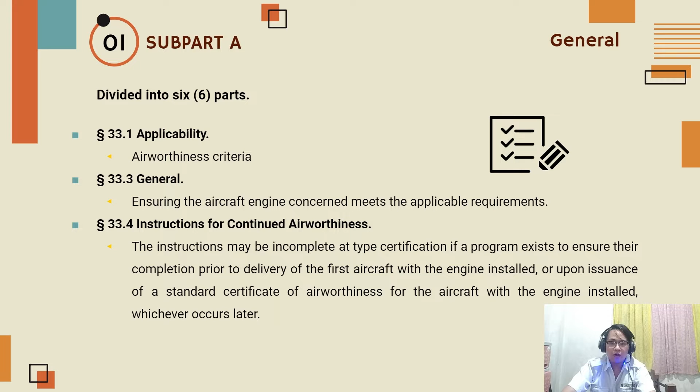The third part briefly discusses instructions for continued airworthiness in accordance with Appendix A of this part. Next, the fourth includes the instruction manual for installing and operating the engine, which discusses approved instructions that must be prepared. At the very least, the directions must include installation instruction, operation instruction, and safety analysis assumptions.

Fifth part would be engine ratings and operating limitations. For this part, it includes the established engine ratings and operating limitations for reciprocating and turbine engines by the administrator.

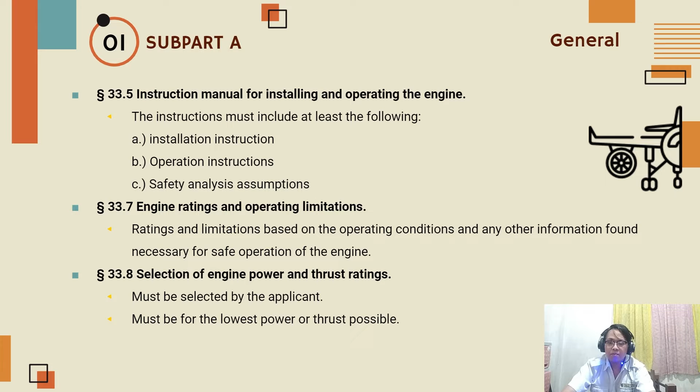Sixth and last part would be the selection of engine power and thrust ratings, in which the applicants must choose the requested engine power and thrust rating. Each chosen rating must be for the lowest power or thrust that all engines of the same type might produce under the condition used to determine that rating.

Subpart B, Design and Construction General. 33.11 talks about applicability, general design and construction requirements for reciprocating and turbine aircraft engines. 33.15 Materials talks about the basis of experience or test, ensuring that having the strength and other properties assumed in the design data.

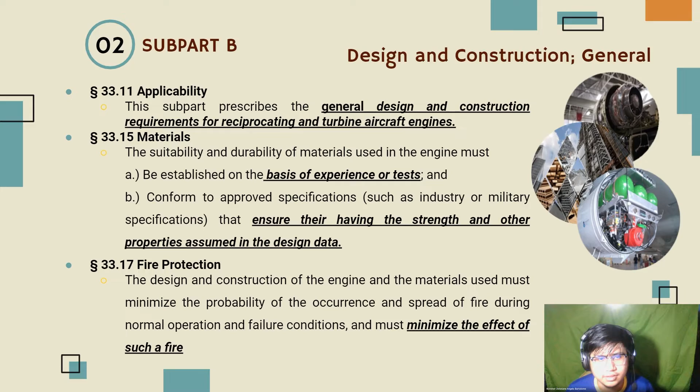33.17 Fire Protection talks about minimizing the effect of such a fire. 33.19 Durability talks about the prevention of unsafe conditions of the engine between overhaul periods. 33.21 Engine cooling talks about conditions in which the airplane is expected to operate.

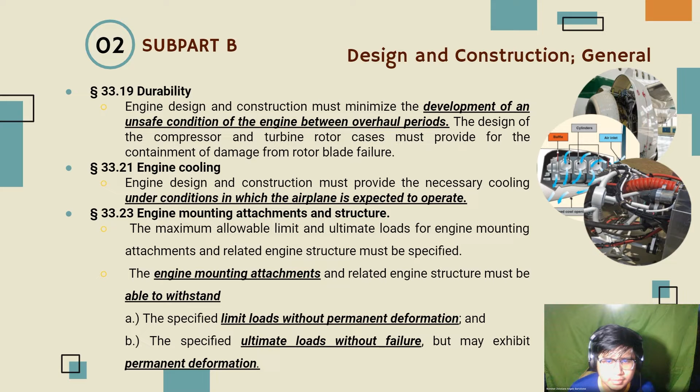33.23 talks about engine mounting attachments and structure. Engine mounting attachments must be able to withstand limit loads without permanent deformation, and ultimate loads without failure, but may exhibit permanent deformation.

33.25 talks about accessory attachment. Accessory drive and mounting attachments are loaded with the provision for sealing to prevent contamination or unacceptable leakage from the engine interior.

33.27 talks about turbine, compressor, fan, and turbosupercharger rotor overspeed, establishing test, analysis, or a combination of both to ensure each rotor will not burst when operating in the engine for 5 minutes.

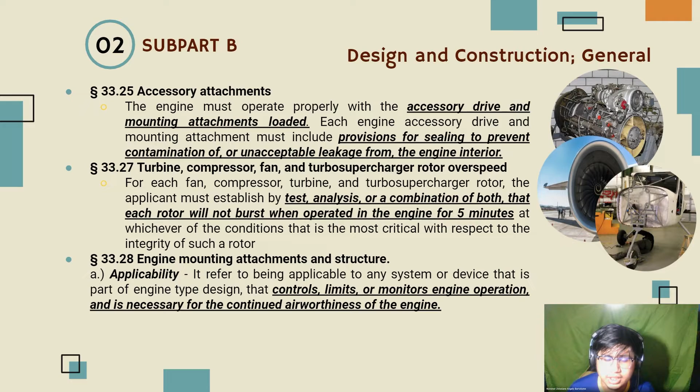33.28 talks about engine mounting, attachment, and structure. For Part A, applicability controls limits or monitors engine operation that is necessary for continued airworthiness of the engine. And 33.28 Part B covers validation.

The first part, function aspect, talks about performing intended functions. Part 2 covers environmental limits, meaning the system must not be adversely affected by declared environmental conditions such as lightning and others.

And for the third part, or part C, control transition talks about faults or failures resulting in a change from one control mode to another.

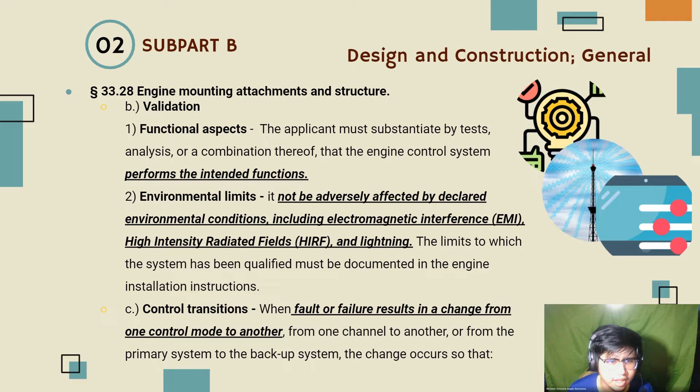33.28D talks about engine control system failure. The first part covers hazardous engine effects and foreseeable failures or malfunctions leading to local events.

And for part E, 33.28 talks about safety assessment, identifying faults or failures that result in a change in thrust or power, or transmission of erroneous data.

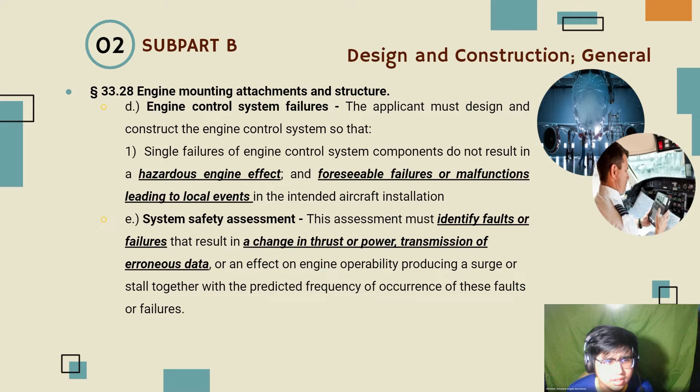33.28F talks about the protection system, which must provide reasonable assurance that operating limitations affecting turbine, compressor, fan, and turbosupercharger rotor structural integrity are maintained. And 33.28G talks about software, which must be designed, implemented, and verified, and must be approved by the FAA.

33.28H talks about aircraft supplied data, addressing issues leading to loss, interruption, or corruption of aircraft supplied data.

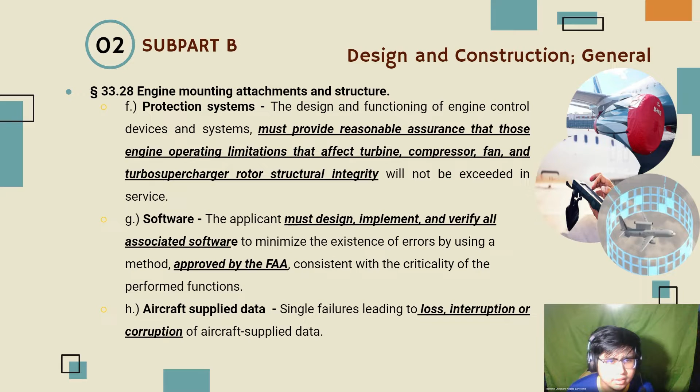33.28I talks about aircraft supplied electrical power, where loss, malfunction, or interruption of electrical power supplied must not result in a hazardous engine effect or unacceptable transmission of erroneous data.

33.28J talks about air pressure signals, considering the effects of blockage or leakage of the signal lines on the engine control system.

33.28K covers automatic availability and control of engine power for 30 seconds, or OEI ratings, meaning the provision of a means for automatic availability and automatic control of 30-second OEI power within its operating limitations.

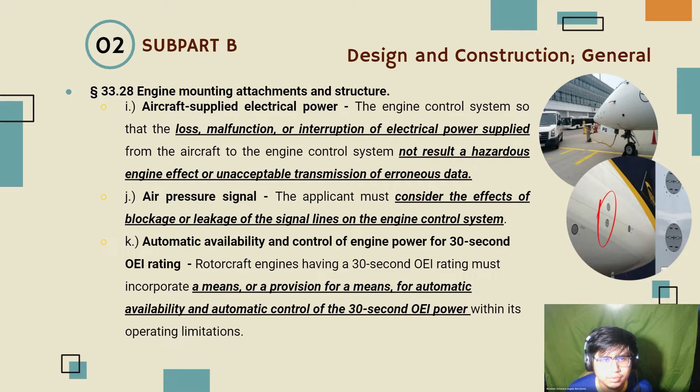33.28L talks about engine shutdown means, providing for shutting down the engine rapidly.

33.28M talks about programmable logic devices using digital logic or other complex design technology, which must provide a level of assurance through a method approved by the FAA that is consistent with the criticality of the performed function.

33.29 talks about instrument connections to ensure that operations of the engine will comply with any engine limitations with its corresponding instrument. With that part, I am done with my presentation.

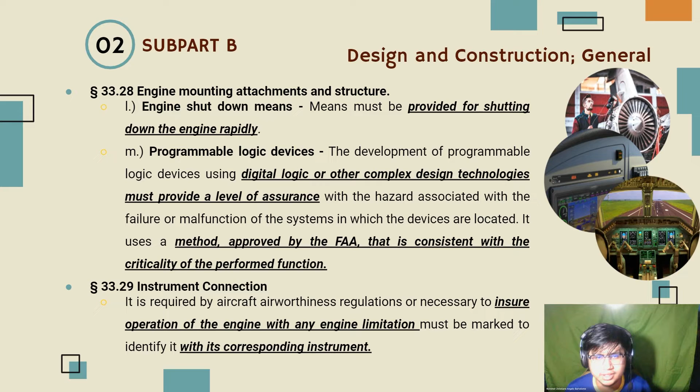For Subpart C, the design and construction of reciprocating aircraft engines. For the applicability, this prescribes additional design and construction requirements for reciprocating aircraft engines.

For vibration, the engine must be able to function normally without any excessive stress and vibration. For turbochargers, its case must be able to contain fragments of compressor or turbine in an event of failure.

The fuel and induction system includes the following: the fuel system that should be able to supply an appropriate mixture of fuel, and the intake passages that should be able to minimize the danger of ice accretion in those passages.

For fuel filtering, the applicant must specify the foreign particles passing through filtering, which must not critically impair engine fuel system functioning. For the induction system, its passages that conduct the mixture of air and fuel must be self-draining.

For the fluid injection system, the applicant must show that fluids other than fuel are properly controlled and flowing adequately. Moving on to the ignition system.

The spark ignition engine must have a dual ignition system with at least 2 spark plugs for each cylinder and 2 separate electric circuits with separate sources of electrical energy, or have an ignition system of equivalent in-flight reliability.

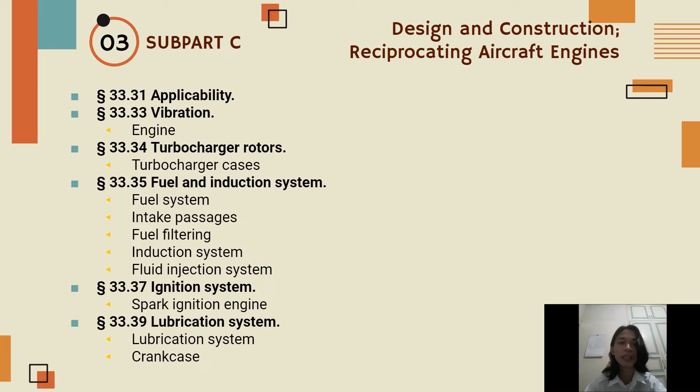Subpart D covers block tests and inspections that reciprocating aircraft engines must undergo.

Before an engine undergoes each endurance test as required by this subpart, the adjustment, setting and functioning characteristic of each component must be established and recorded first, which can be done through vibration test, calibration test, and detonation test.

The vibration test establishes the torsional and bending vibration characteristics of the crankshaft as well as the conditions under which the engine can be operated safely in an abnormal state.

The calibration test will be the basis for establishing the engine's power characteristics and the conditions for the endurance test specified in Part 33.49. Lastly, the detonation test is for establishing that the engine can function without detonation throughout its range of intended conditions of operation.

After this series of tests, the engine can now undergo the endurance test.

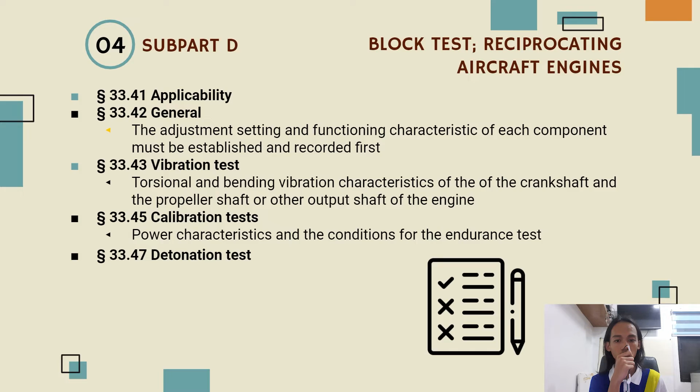In Part 33.49, the endurance test must include a total of 150 hours of operation, in which the engine is subjected to a series of runs, depending upon each specific type and contemplated use. Additionally, the runs must be made in the order found appropriate by the administrator for the particular engine being tested.

Furthermore, an operation test is also included, as this will be the basis for the operational characteristics of the engine. This includes demonstrating backfire characteristics, starting, idling, acceleration, overspeeding, functioning of propeller and ignition, and other operational characteristics of the engine.

As for those engine systems and components that are not substantiated in accordance with Part 33.49 or the endurance test, an additional test must be conducted in order to know that these systems or components perform their functions in all declared environmental and operating conditions.

After a series of runs in the endurance test, an engine will undergo the teardown inspection, in which it will be disassembled and each of its components will be inspected for conformity to its characteristics and type design in accordance with the information submitted in the endurance test or Part 33.49.

As for the general conduct of block tests, this includes things that an applicant may follow, such as servicing and making major or minor engine repairs in accordance with the instructions in Part 33.4.

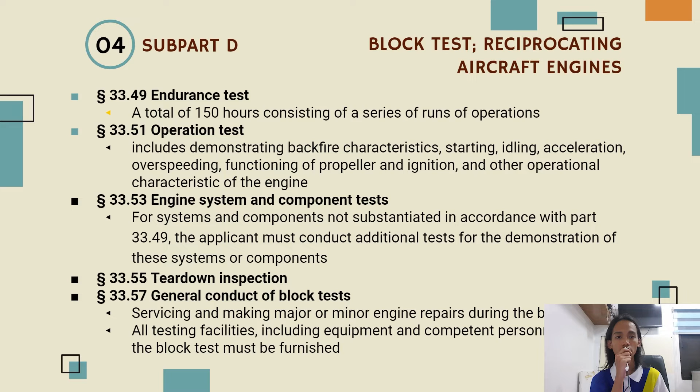Subpart E, Design and Construction for Turbine Aircraft Engines. This subpart prescribes additional design and construction requirements for turbine aircraft engines.

Stress analysis must be performed on each turbine engine, showing the design safety margin of each turbine engine, rotor, spacer, and rotor shaft.

Vibration. Each engine must be designed not to induce excessive stress in any engine part because of vibration.

Pressurized engine static parts. The applicant must establish a test for a stabilized period of 1 minute, and the part must exhibit no permanent distortion or leakage.

Surge and stall characteristics. The engine must not cause surge or stall when starting, changing power or thrust augmentation, or limiting inlet air distortion or inlet air temperature.

Bleed air system. The engine must supply bleed air without adverse effect on the engine.

Fuel system. Fuel supplied to the engine at a flow and pressure specified by the applicant, the engine must function properly. There must be a fuel strainer and a fluid injection system that is adequately controlled.

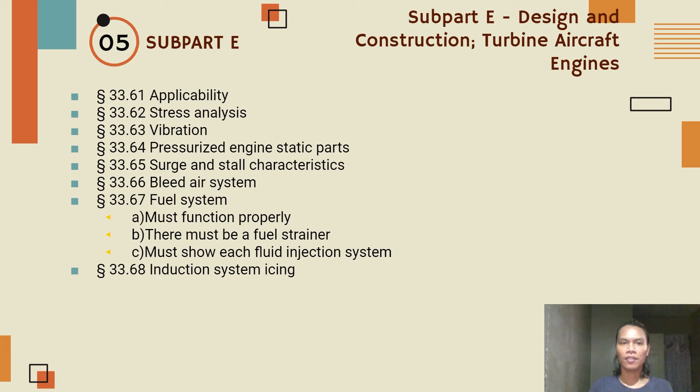Ignition system. Each engine must be equipped with an ignition system for starting the engine on the ground and in flight.

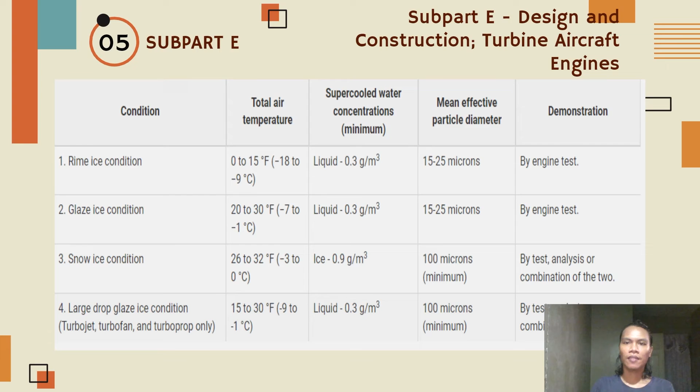Engine life limited parts. Operating limitations must be established which specify the maximum allowable number of flight cycles for each engine life limited part. Typically, engine life limited parts include discs, spacers, hubs, shafts, high pressure casing, and non-redundant mount components.

Lubrication system. Each lubrication system must function properly in the flight attitude and atmospheric condition in which an aircraft is expected to operate. The system must have an oil strainer or oil filter, oil tanks, oil drains, and oil radiators.

Hydraulic actuating system must function properly under all conditions. For safety analysis, the applicant must analyze the engine, including the control system, to assess the likely consequences of all failures.

Bird ingestion tests must be conducted with the engine stabilized at no less than 100% takeoff power or thrust. The test includes large single bird, small and medium flocking bird, and large flocking bird.

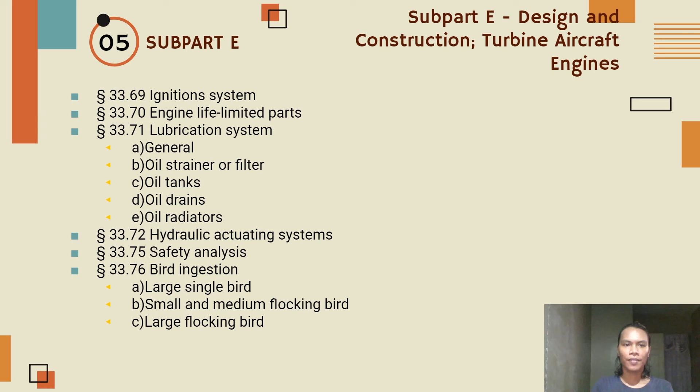For rain and hail ingestion, the engine must not cause unacceptable mechanical damage or unacceptable power or thrust loss after the ingestion. Each fuel burning thrust augmentor, including the nozzle, must provide cutoff of the fuel burning thrust augmentor and permit on-off cycling, while being controllable within the intended range of operation.

Upon a failure or malfunction of augmentor combustion, it must not cause the engine to lose thrust other than that provided by the augmentor. Lastly, it must have controls that function compatibly with the other engine controls.

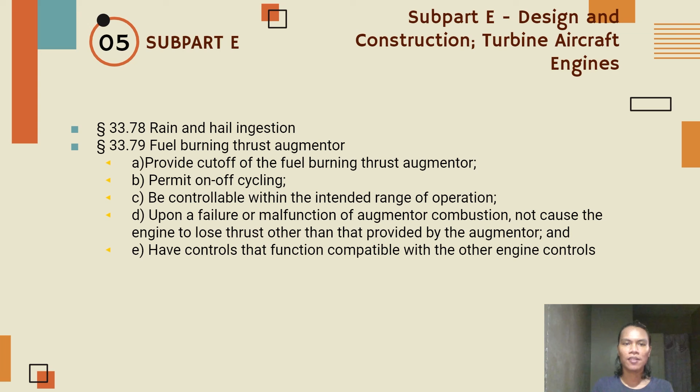For Subpart F, we shall have a general overview of block tests for turbine aircraft engines. The purpose of this subpart is to establish a series of block tests and inspections to ensure the quality and safety of each turbine engine.

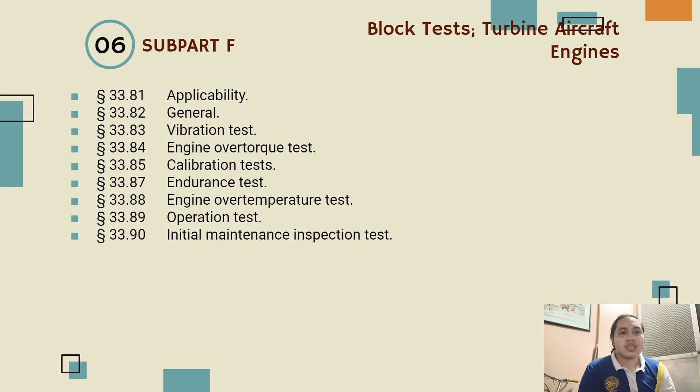These various tests include vibration, engine overtorque, calibration, endurance, engine overtemperature, and operation tests. In addition, there's also initial maintenance inspection, engine system and components, rotor locking, teardown inspection, and etc., which are requirements for the airworthiness of an aircraft.

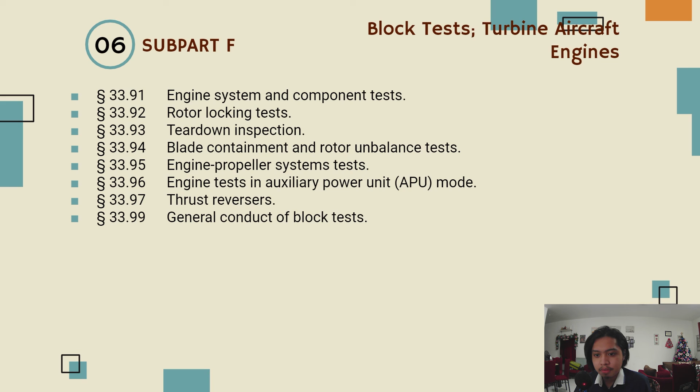For the last subpart of FAR 33 aircraft engines, we will discuss special requirements for turbine aircraft engines. Its only detailed section is design and test requirements for early ETOPS eligibility, which discusses design approval for an engine to be installed in a two-engine airplane approved for ETOPS without service experience.

ETOPS, for those who don't know, means Extended Range Twin Engine Operational Performance Standards. It is a certification that permits twin-engine aircraft to fly routes at safe time periods from the nearest airport suitable for an emergency landing.

The other notorious meaning for ETOPS is engines turn or passengers swim. This whole section discusses parameters, tests, and many simulated service missions needed to be completed, approved, and deemed acceptable by the FAA. That's about it for the presentation.